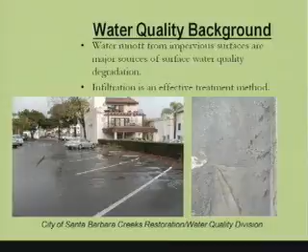The slide on the right, it's hard to tell, but there's a lot of oil on the surface of the runoff from that parking lot, and that's a common sight if you look at during a rainstorm.

So for the Stormwater Grant Program, the purpose of the Prop 84 program is to provide funds to local public agencies for projects that reduce and prevent stormwater contamination of rivers, lakes, and streams. The minimum grant amount is $250,000 and the maximum grant amount is $3 million for each project. The grant guidelines require a 20% funding match from the applicant agency.

Because of the multiple benefits of on-site stormwater infiltration, it's considered a superior best management practice strategy, and the Stormwater Grant Program guidelines promote the use of infiltration as a stormwater management strategy. One type of tool in that strategy is permeable paving systems, and they're a really effective approach at achieving that.

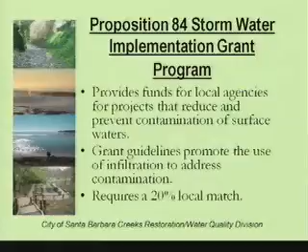Permeable pavers were chosen as the preferred design for retrofitting existing paving areas with low-speed traffic for several reasons. They detain and filter polluted runoff through passive infiltration, satisfying the city's stormwater management requirement to capture and treat the volume of a 1-inch storm in 24 hours. They don't compromise the existing use of the facility or surrounding structures, since storage and infiltration takes place under the surface, and they don't use energy for operation. They require very little additional maintenance and improve the aesthetics of the site.

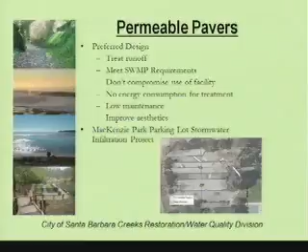The city recently completed a permeable paver project in the parking lot at Mackenzie Park, which you're all familiar with. Early monitoring results have confirmed its effectiveness at capturing and treating stormwater runoff. The pavers have captured all of the runoff from storm events up to this point. We haven't had that many storms, but all the storms we've had have allowed the water to infiltrate into the soil below the pavers.

Before the project was installed, this runoff would have flowed quickly to the storm drains, creeks, and the beach untreated. Another side benefit of this project is that it has reduced the potential for flooding in the parking lot. You can see in the picture that big puddle. The main storm drain inlet of the parking lot used to get easily overwhelmed during storms with leaves and stormwater, causing it to clog, and that large Mackenzie puddle was a common sight that drained slowly after storms unless someone came out and unclogged it. Now, since much of the stormwater is captured by the pavers, the potential for flooding has been reduced.

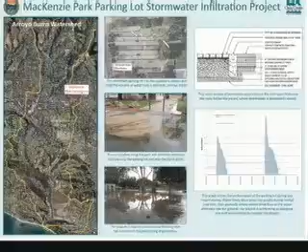The Creeks Division is proposing to apply for grant monies to fund several stormwater treatment retrofit projects, packaged into one project under the grant application. The first is the Oak Park parking lot near the Horseshoe Pits, and nearby that is the Oak Park bandstand area, shown in the picture on the left. The parking lot is at the bottom, and the upper left is the bandstand area, which is all asphalt paving.

Then there's the Oak Park picnic area, across the creek by the barbecue pits, across that footbridge. Another project is the Louis Lowry Davis Center and Teen Center parking lot, a large parking lot downtown. And another one we're looking at is the Franklin Center parking lot on the east side, a small parking lot, but it looks like a good fit for a permeable paver design.

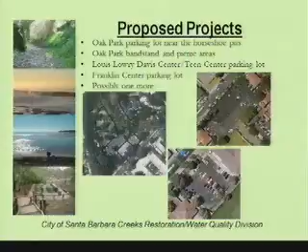The total cost for the project is estimated to be $1.8 million. We're proposing to seek a $1.5 million grant, matched by $300,000 in local contribution. Measure B funds would be used to provide that 20% match, and the funds would come from the Creeks Division Capital Program line item identified for stormwater treatment retrofit projects. The concept grant proposals are due on January 31st. Proposals will be scored, and the highest-ranking applicants will be asked to submit a full proposal in March 2012.

Last of all, I wanted to end this presentation with the video of the water truck that we had during the opening, the ribbon cutting for Mackenzie Park. It's a great visual on how these things work.

Short. Very short, maybe. Let's see. Maybe it's just a JPEG. Well, in this video, the water truck is squirting out water full blast, and all of it is basically disappearing into the pavers, going underneath.

And that's about it. Does anybody have any questions?

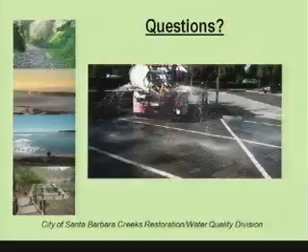Mr. Chair, I was so completely persuaded by Mr. Burgess's presentation, as well as the Mackenzie Park opening and the water truck demonstration, that I would like to move that the committee recommend that the application for the $1.5 million be submitted as presented in the staff report.

Thank you, Mr. Moldaver. Let me see if there are any other questions from any of the members before we move to that motion. Are there? Does anyone have any comments?

Mr. Jordan shared that at a briefing with another water board function, Mackenzie Park was raised as an example of what should be happening in cities. He noted that, as he's been told up and down the Central Coast, this city has a Measure B that allows it to start the funding process, while other cities, some larger, are struggling to access grant funds and address their NPDES permits. He said to feel fortunate to have a tax base that allows moving forward on these great projects.

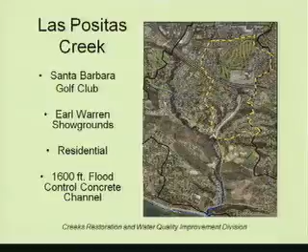This project was originally envisioned over 10 years ago by a county-wide effort. Project Clean Water looked across the county and tried to find sites good for stormwater treatment areas, and what we commonly refer to now as low-impact development. Not sure if that term was widespread back then, but that's the goal they were looking for: LID, low-impact development projects.

The golf course project, Upper Las Positas Creek project, was identified as a prime candidate because it was public land, it's on a historic creek, and it receives urban runoff and so forth.

The main goals: treat urban polluted runoff. We have a big opportunity to enhance wildlife habitat because it used to be a functioning creek. We're also looking at other opportunities to decrease flooding, which has effects on water quality via soil erosion and unstable banks downstream. Since this is such a public project, we also had a great opportunity to maximize education, and since it was on and adjacent to a public golf course, we really needed to maintain course playability both through the project construction and afterward to the best of our ability.

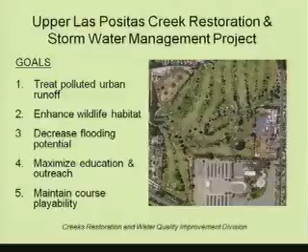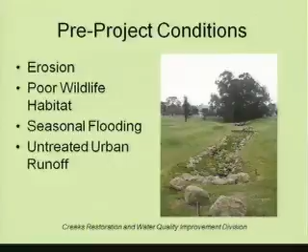You can see the intensive turf management areas right next to the actual creek bed. Because the turf goes right up to the edge of the creek, we don't really have those buffer areas where nutrients can be filtered out or have wildlife vegetation buffers so that you can facilitate either breeding or migratory birds.

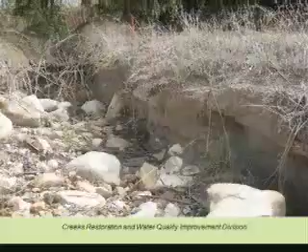One issue with this asphalt channel is you get high velocities because there's no vegetation to slow down that stormwater, and downstream you get erosion. You've got this water blasting onto an unprotected earth channel, creating incised creek beds, which lead to other problems downstream, such as sediment washing down to Arroyo Burro Beach, and attached to that sediment is bacteria and other contaminants not good for water quality.

Here's a different view showing further downstream, and you get the picture that there's not a lot of habitat value and conditions that are not good for water quality. So the design really tried to find a hybrid where we're restoring habitat but also creating some structure you might not find in a natural creek—more of a typical stormwater management project with large basins and perhaps some mechanical controls to manage the amount of runoff coming downstream and exiting the site.

The design phase took about 2 years, spread out over about 3 years because it was done in 2 phases—a preliminary design and then a final design. Construction didn't start until 2009, originally scheduled for July through November of that year, and construction started in July.

We got some decent bids and hired a company we had worked with before—a local company experienced in this type of work.

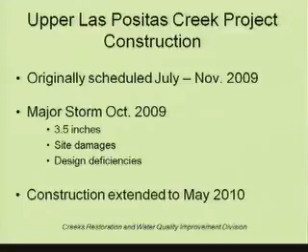We had a failure on 2 of the large berms on the project. We were heading towards the end of construction, so we had areas ready for landscape, some areas already planted, and a lot of erosion control material had been put down. But you really need a couple months of good growth and to finish up those last landscape elements before the project is complete.

This storm went through and eroded some of the channels we had just constructed. Some of the bare hillsides were eroded, but we did have the large stormwater basins to capture a lot of that runoff.

Nonetheless, that large storm was perhaps a blessing in disguise, in that we were able to realize the design was not adequate for the site conditions, and the actual engineering work probably wasn't quite as good as it could have been. At that point, a redesign of certain elements—including the berms, some of the rock channels, and the rock weirs I'll show you in a moment—were upgraded to a more sturdy design, in line with FEMA regulations that regulate some of the larger stormwater projects and dams in our state and nation.

So basically, October 2009 construction was supposed to wrap up in November. We did a redesign of a portion of the project, went back out to construction, continued to have several storms that winter, and construction was extended to May 2010.

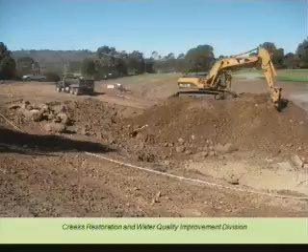The actual construction on a project like this involves a lot of grading—about 30,000 cubic yards of soil was moved. We're creating these large basins, but in addition we also have quite a few smaller basins that collect stormwater throughout the site. So it's a lot of moving soil, some fine grading—very subtle, but there are quite a few small basins routed out throughout the project.

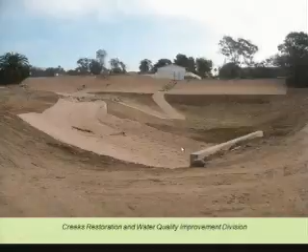Erosion control fabric is laid down—this is a slightly different angle, looking east towards the Adams School up here. We've got that main channel I talked about earlier: excavate it, widen it out, lay back those erosive slopes, lay down the erosion control fabric, then bring in some native sandstone rock typically found in these creek channels, and then plant it.

Now, the cost of the project - these costs reflect the increased cost that was due to the storm damage, as well as the redesign and the additional benefits that we saw from that design. But essentially, the design phase was about $300,000. The construction phase was $2.47 million, for a total price tag of $2.78 million.

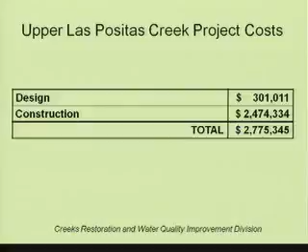Now, if you want to break that down, after we started construction, we actually received several grants. This was before the storm event, early in the construction phase. So the total construction cost and total project cost is not what the city or Measure B has paid out. If you take the total cost, $2.78 million, and deduct the grant funding that we got, $1.67 million, we also reached an agreeable settlement with the design engineer and the contractor for over $650,000. So the actual Measure B expenditure is $428,000.

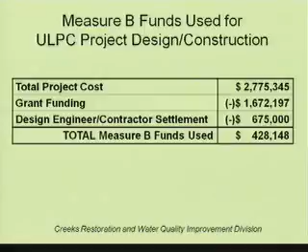Now, a much cheaper but really effective part of the project was the education and outreach, and this was a really big effort both by our Creek staff as well as the Adams School and some of the golf course staff and UCSB faculty. One of the big efforts was creating an outdoor classroom, more or less, at Adams School where students could take advantage of an on-campus learning center in the form of a native plant garden and a bioswale. Over 2,000 students have participated in that portion of the project, and that has also included over 70 presentations given by their teachers and other educators. It's really been a great success as far as the feedback that we've received from the principal, the teachers, the staff there, and the students.

Of course, there are other opportunities for outreach and education, and none so more than the golfers that were actually on the site during construction and have enjoyed the site afterwards. That has been an ongoing effort to do outreach to them, and that's also including interpretive signage, which is going to be installed very soon.

The wider community has participated in the project through tours and Creek Week events. City TV has done several documentary specials that have aired over the past several months. And tours have been ongoing. One of the things I'd really like to do is get people out to the course and the project when it's raining, because that's really when you see the project working. It's really an exciting time. So I've got my contact info at the end of this presentation for people out in the public who want to contact me for that opportunity.

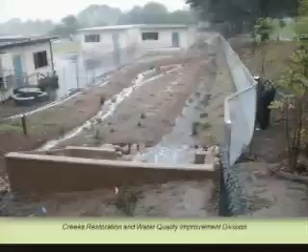This is the Adams School portion of the project before the project was done. Here's that asphalt ditch. Behind the camera here is the Samarkand neighborhood, and so you've got a storm pipe coming out across Las Positas Road. Basically what was done was the asphalt was removed, planted with the help of the students, and we've diverted the flows into a low flow channel here, and then during large storms you get that main channel conveying most of the stormwater.

And here it is afterwards. I believe the students planted over 800 native plants along this stretch of the bioswale and native plant garden.

One of the main goals of the project was to restore plant and wildlife habitat. During the course of the project, over 10,000 native plants were installed, comprised of over 60 native species. One of the benefits of this project is it's not just wetland habitat or upland habitat, it's both of those things and everything in between.

We've got riparian and creek habitat, bioswales, wetlands, ponds, oak woodland, coastal sage scrub, grassland—basically the whole suite of habitats that were most likely present at that site before a lot of the development went in. So it's restoring a lot of those plants which create those resources for the birds and other animals that use it.

So I noted these landscape buffers. In that earlier slide, I showed the pre-project condition having no buffer or gradient between intensively managed turf and those rock channels. A lot of these habitats basically create an area which shields the wildlife from the intense use activity next to the project, whether it be the schoolyard, golfers, or residents nearby. It also creates a nutrient buffer between the fertilizers and other amendments used on the golf course and in Samarkand—those can basically be filtered out before they reach the main flowing water.

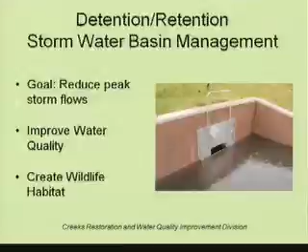And here it is shortly after a large downpour.

You can see the handle down here at the bottom of that head wall. In a really large storm, this head wall would disappear underwater, and then over a matter of hours, that water would recede as it flows downstream.

Just downstream is this large wildlife and stormwater retention basin. This was the detention basin, used only for a short period of time. Then here is the retention basin, where over 2 million gallons of stormwater is held for months on end, if not until the next winter. That first basin we just looked at is further upstream, and it catches runoff from the neighborhood off of South Ontario.

Here's the other large stormwater basin on the eastern portion of the project. In summary, these two large basins hold over 4 million gallons of stormwater.

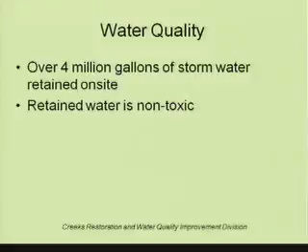Based on our preliminary testing, the water we're holding and storing for months on end is non-toxic, so when we release it downstream, it doesn't have adverse effects on wildlife. The nutrient concentrations have declined based on the water coming in versus what we're measuring in these basins. It's several different mechanisms.

It's plants removing nitrogen, phosphorus, and other nutrients that have bad effects on water quality downstream. It's also sediment dropping out, because some of those nutrients are attached to or made up of that sediment. Because the water is so still, sediment is able to leave the water column and stay behind.

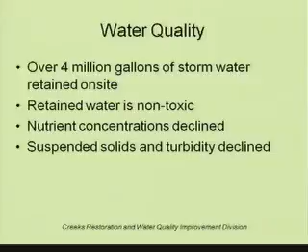Also importantly, fecal indicator bacteria is below the recreation criteria for this project and throughout the state. So basically, we want to make sure the water we're releasing isn't bad, but also that this project actually works. And all indications are, yes, it does work and improve water quality.

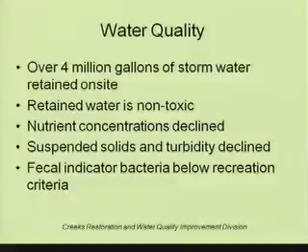This is a project that requires maintenance, as do all of our projects. This year we budgeted $50,000, and as time goes on, we expect that funding should decrease because plants grow in and there's less space for weeds. The majority of the $50,000 is spent in the first couple of years on weed removal, remulching areas that need it, and irrigation repairs.

Because we have ponding water, we have potential mosquito issues, and we've been able to deal with those using a biocontrol known as BTI, which infects the larval stage of the mosquito and doesn't allow it to develop into a flying adult. We also use mosquito fish, which predate on larval mosquitoes.

Another big effort this year in our maintenance is infill planting in areas that are relatively bare or not looking as good as I would like. We also have mechanical and drainage systems on the project, so part of our job is making sure those valves and other mechanical apparatus are exercised during the year, lubricated and ready for the next season, and that pipes are clear and drop inlets are clear.

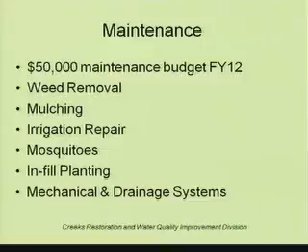In summary, we've got about 8 acres of stormwater and wildlife habitat restored—5 acres of wildlife habitat, 3 acres of stormwater management components—and a robust education and outreach program through the elementary school, UCSB, the local community, and the folks playing golf right next to the project. As I mentioned, our ongoing costs for this project will decrease over time as plants fill out and the project matures.

I urge people to contact me with comments or questions, or if you want a tour at any time of year. Here's my contact info, and I'd be happy to answer any questions all of you have. Thank you.

Thank you, Mr. Thompson, that was great. Would anyone like to make any comments or ask any questions?

Chair, I have a question. Mr. Thompson, can you tell us what your mosquito control program consists of? Are we doing that in-house or is that contracted out? We're actually doing that in-house, and I do it myself.

Because I'm out there weekly, I do inspections of the standing water. Let me give you a bit more detail. When I go out, it's either there is mosquito larvae or there is not, and during warmer times of the year, that's when you'd expect to see more mosquito larvae. We distribute the BTI, that biocontrol I mentioned, during times when we do see mosquito larvae.